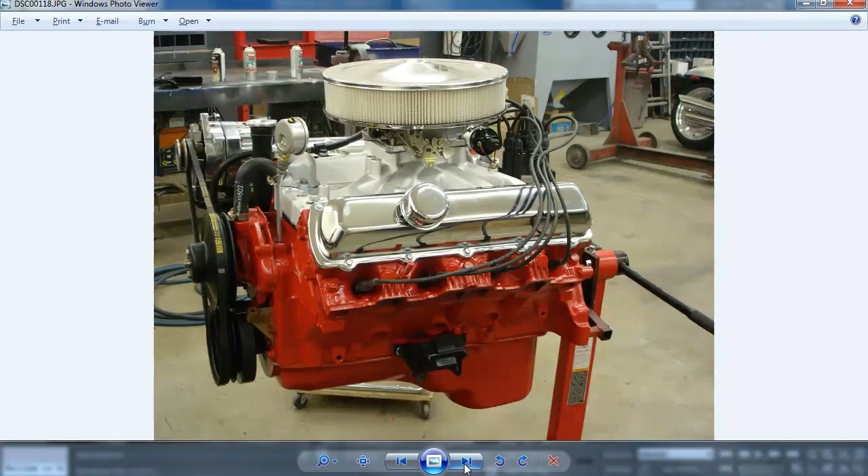Welcome to the second part of my hot rod tutorial where we will be continuing our highpoly engine. I talked about the other parts we're going to add detail to, and right now I'm just looking at my reference a bit more to see where I'm going to pick up where we left off last time.

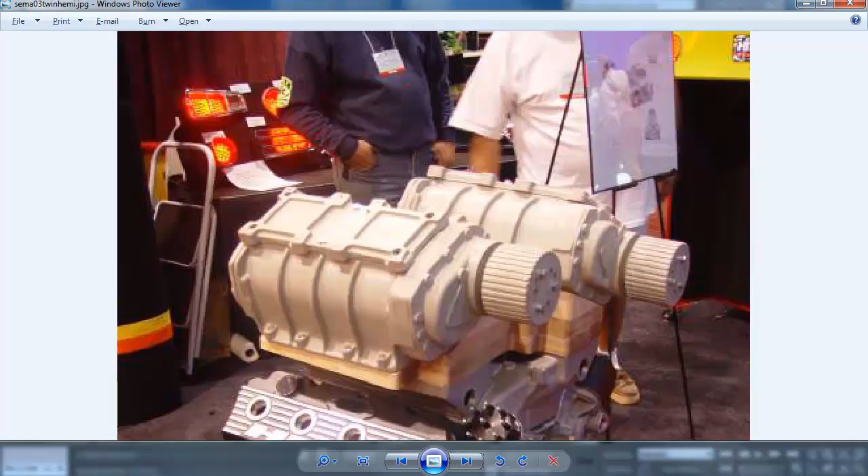At the top we still have to create the carburetors, which are the parts of the engine that mix fuel and air together before it gets transferred into the engine and ignited to power it. Those carburetors are on top because the mixture gets compressed by the supercharger beneath it - fuel is inserted into the carburetors, air goes through the big scoop at the top, and it comes out at the bottom as the compressed mixture that goes into the engine.

These carburetors are actually the most complex part on this engine model, which is why I'm not going to postpone it too long to start with it. If I have a really difficult part of a model that I'm not so sure how to do, where I can't really visualize it clearly, the best thing to do is get it done as quickly as possible. If you don't, it's just going to drag along - you keep postponing it, and in the end you might lose interest in the project and it might not get done.

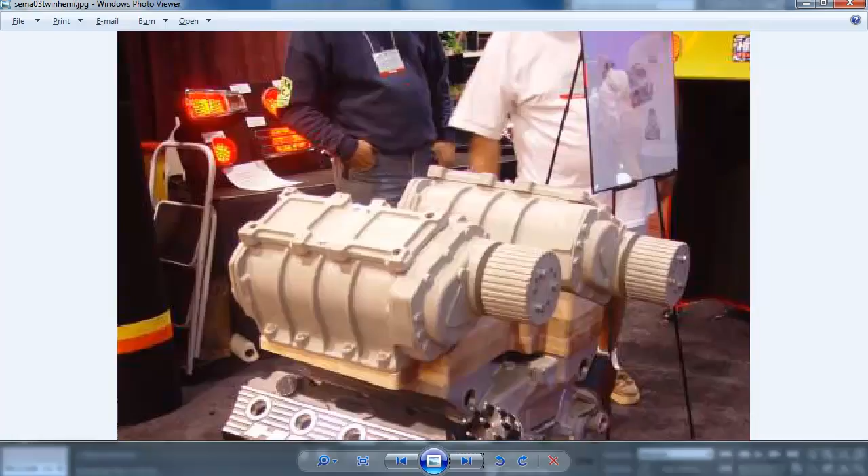So here I'm creating the structure - these little blocks that extrude from it, used to connect to the supercharger. I'm mostly going by that reference picture because it clearly shows what the connection part looks like. This part is technically still part of the supercharger, but it doesn't really matter since I'm creating it as a separate part - no way I'm going to model this in one connected piece.

There's no easy way of selecting all these parts - most of it you just have to click manually. It looks easy at 200% speed, but it's a bit tedious to select.

This is a rather complex block structure - we need to add some more edges in here to harden things up. It's easier if you do it by two. Since the distance between two edges, where I'm doing a connect between, varies all the time, I also need to vary my connect distance. If they're really close together, you need to lower the amount quite a lot.

Some parts I can't forget. At the top I forgot that I also need to harden that bit, so I need to add another one over there. Another part here - for such a structure, I really need to add a lot of them. It's not really hard, just can't forget to do them.

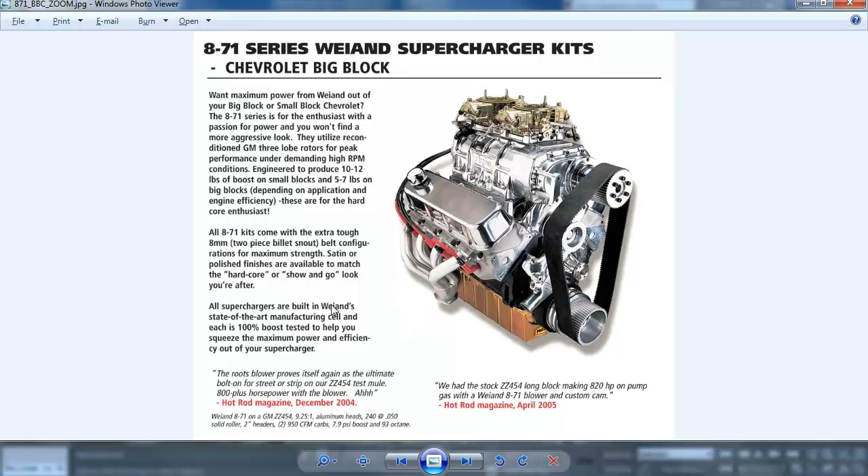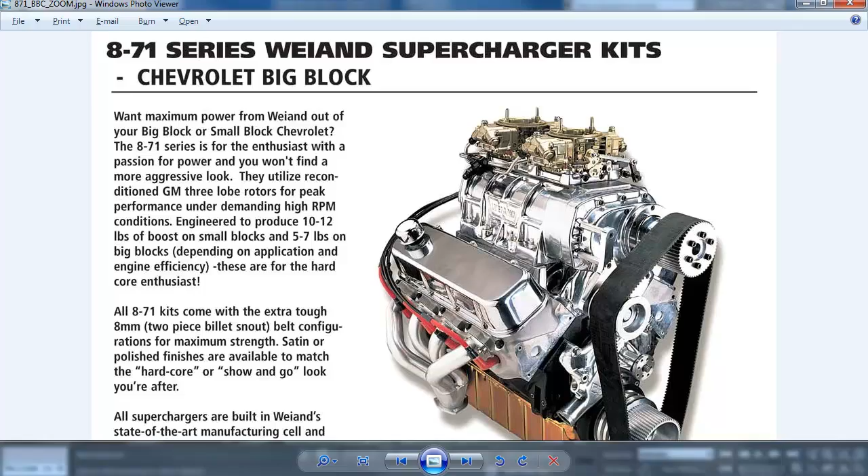The ones on the inside look a bit rounded too, but that's not so important because you probably won't see them so much. Mostly going by this reference also - this one looks quite interesting, I like the shape, the sort of V-shaped things at the side.

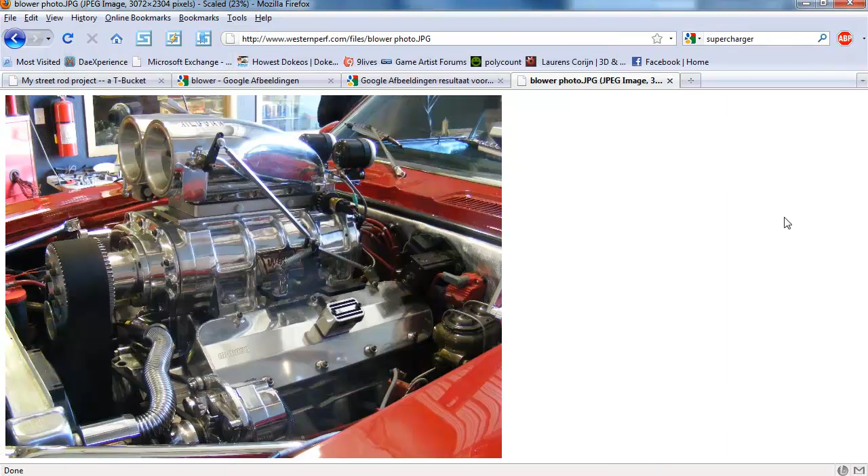Looking for some more reference because I think this is a tough part. It really helps to use different search terms in Google - it can make a difference. This one isn't so good. Yeah, this one's okay, but it looks really simple, so I don't think I'll use it. Still, it doesn't hurt to save it to my reference folder. Continue searching a bit more.

I'm just opening all these images in a new tab that I think are interesting. Adding '540' to it, since my engine's a 540, might help - just be a little bit creative with search terms. Yeah, this one looks okay too, but I think it's still a little bit too primitive in terms of shape and connection, so probably not going to use that either.

Blower engine - supercharger is another word for blower. You can see different stuff turns up all the time, so being creative with these search terms is quite important. That one looks good. Cragar blower - finding a lot of similar stuff now.

See what I dug up here. Wow, this one's interesting. It's a bit too square for my taste, but I'll save it anyway.

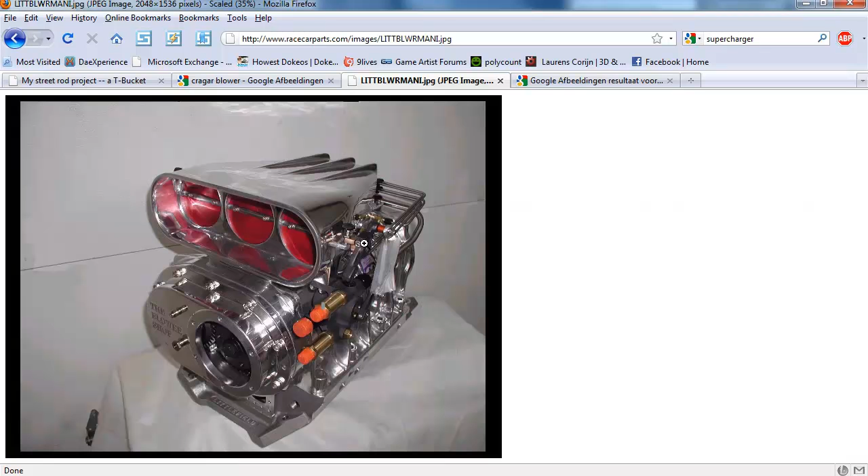This one's also the same square, simple layout. Yeah, this one's not bad either, but I like the fins on the back, though I don't think I'll add them. They're more 50s type than they are hot rod. This one's pretty good.

Let's see, yeah, these are some nice detail pictures. Too bad they're super low res. Can barely do anything with that.

So, Weiand seems to be another brand of blowers and superchargers. This one looks like an interesting picture. Yeah, this is definitely a keeper. That's the sort of stuff I was looking for.

So you see, when looking for reference, you might end up getting to know brands, words, terms that can help you in your search. See, this one's just perfect. This is exactly what I needed. Some nice, clear, high-res views from every side. And it's all because I got to know this Weiand blower supercharger brand. This is the sort of stuff I need to build these carburetors.

This one's a really nice picture too. You can see there's a lot of wires running around on that thing. I'm not going to make those because, well, first they're hell to make, and second they're just going to up the poly count way too much.

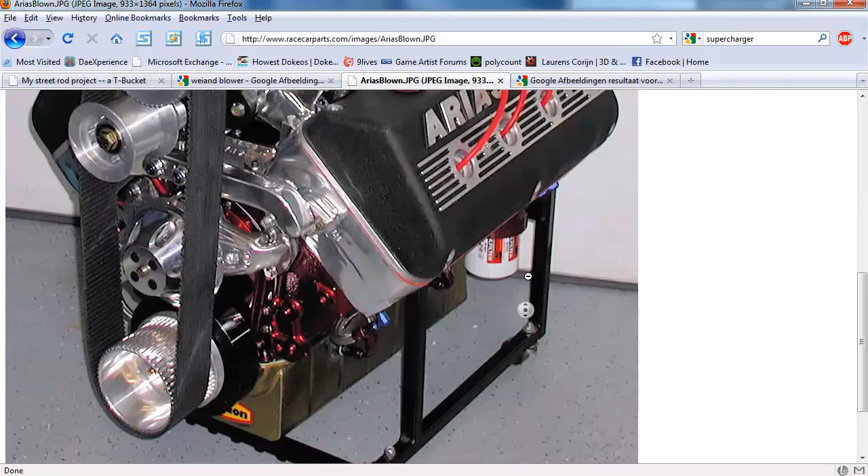And you probably didn't notice on the final result image that's been shown alongside the tutorial. This one isn't so cool. Looks more like the thing you'd put on a boat or a dragster, not really on a car. Well, I'll save it anyway. You never know, maybe even for a later project, it could come in handy to save any of these ref pics.

Because it's happened frequently that I remember when I started some project I needed reference, and I was sure I found this on Google searching for that term, but it turns out a year later it had disappeared and I couldn't find it again. Yeah, this one's great, really good.

So we have our base plate here, and create that part on top. So there's actually two separate carburetor units next to each other.

Takes care of better, more fuel that gets into the engine, since it's a really big engine, needs a lot of fuel. There we go, use bevel to create this shape.

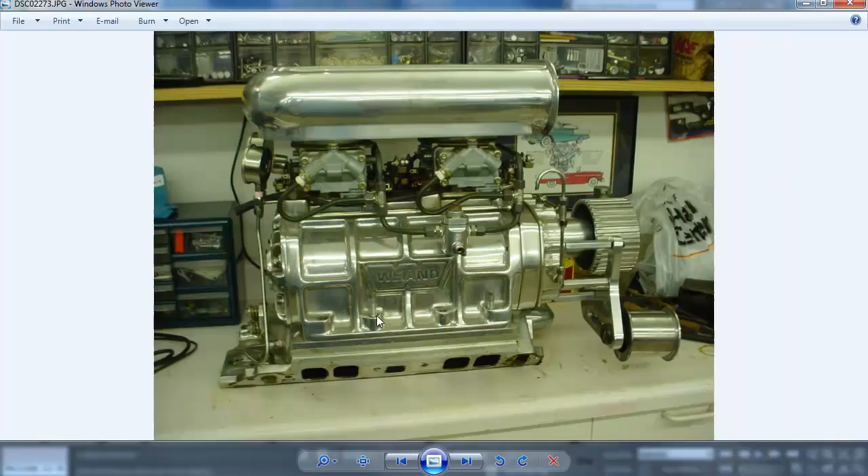Something like that. So you see, these are like, simply said, tunnels through which air goes, and fuel is mixed with it to create the exact fuel mixture of air and fuel. Because you know, a mixture can't explode if there isn't both air and fuel, an explosive component.

So yeah, let's see, I want to turn this into a round shape, so I need to do a little bit of tweaking. Select those parts, I need to space them apart so I can get that nice cylinder shape. Well, semi-cylinder shape.

I'm just doing it on site, just keep selecting and using scale. Why scale? Because it works in 2 directions. There we go, that's starting to look nice and round.

Harden things up a little bit, add those connects, then at the top...

You notice that I'm not really exactly following one of these reference things. For the general shape, which is quite hard to discern from the reference images, I'm just going along creating something I think would work and would seem viable.

You've seen this tunnel shape on the one I said looked more like a boat or a dragster engine, so I'm sort of mimicking that, making the top cylinder a bit fatter. Same old trick, reusing details.

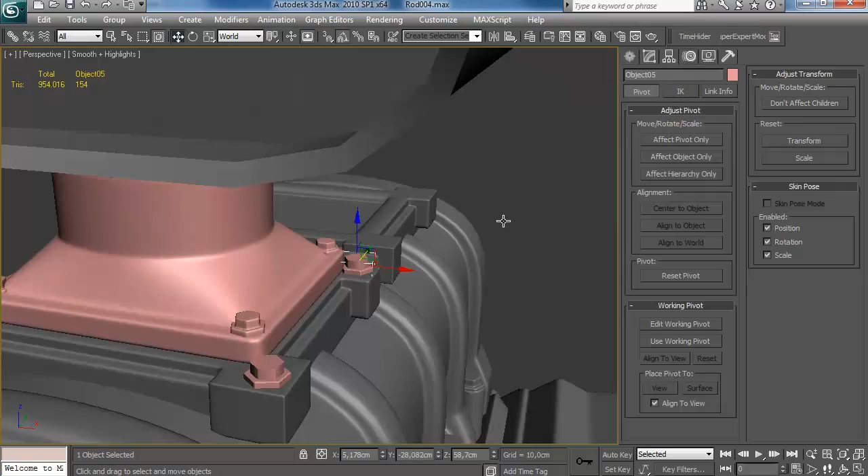Make those a little bit smaller. Move that about, just spacing these parts.

See, it's totally logical to add these bolts here because the carburetors and that carburetor base plate actually bolt onto the superchargers. So adding details like this is an easy way to get it to look more interesting.

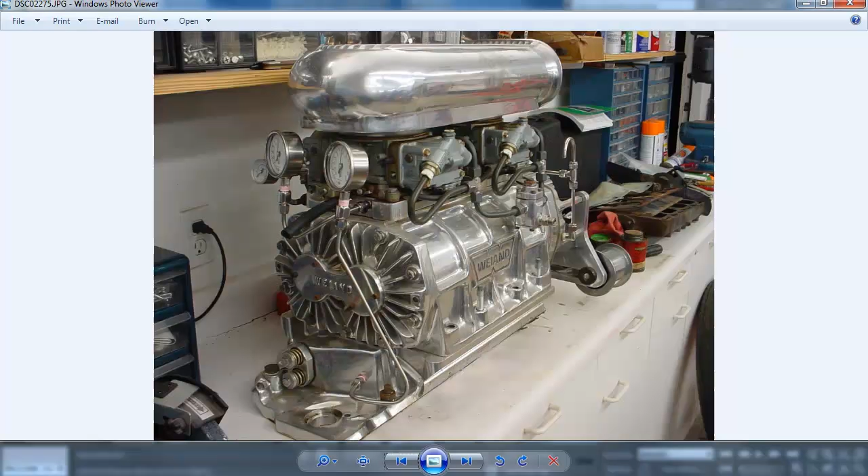You can see there's quite some bolts on these examples I have here. Also notice how the back from that one Weiand supercharger is really interesting. It has this fan radial shape of cooling fins. I'm going to add those for sure.

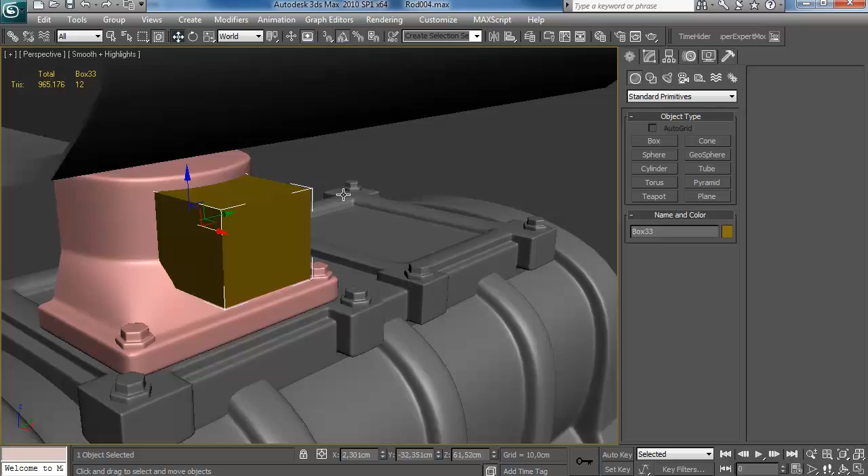Alright, so what I just did here, I deleted half. Why? Since I'm going to make these carburetors symmetrical. They're probably not symmetrical in real life, but I'm doing it anyway because nobody will notice, and it saves me a lot of time modeling, texturing and unwrapping, everything. So it's pretty much a no-brainer for me to do it like this.

It's definitely something to consider when you're creating real high quality art, especially in a company. You need to reuse and mirror parts and reuse texture space as much as possible, just to save time and work more efficiently. If you do everything unique, you're going to work on it way too long, use too much texture space, and creating your textures is just going to be too much work. So a big part of a high quality workflow is being efficient and doing things in a smart and thought-through way.

So it starts at the high poly, at the actual modeling. You need to think about the mirroring and reusing of parts. Sometimes if you do an extrude, parts intersect, so you need to fix that.

This shape is mostly going to make it look more interesting. I'm going to add those V-shaped parts on it as well. There we go, I got this little bolt part here. Rotate it, make it smaller. You see, I modeled this bolt once, and I just keep reusing it all the time.

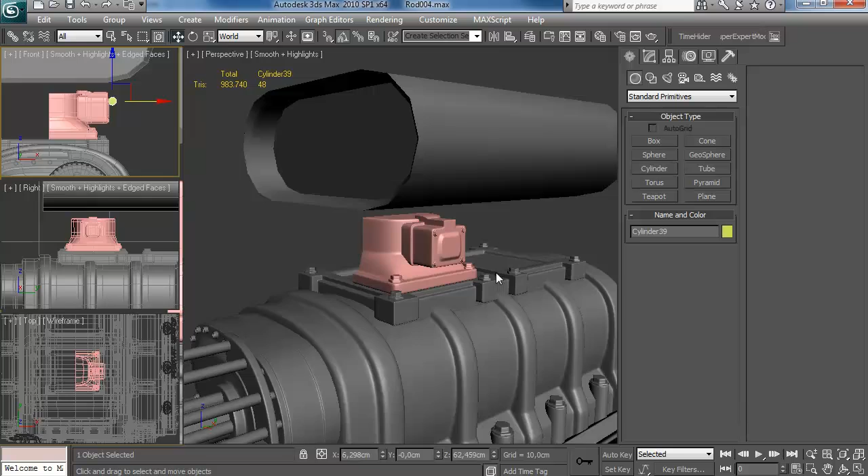Cylinder, I'm going to create that from the side here. This is going to be a little bit tricky to model, but it's nothing impossible. Some people who aren't really that proficient at modeling yet might be a little bit afraid of this kind of shape, how you would tackle two cylinders connecting at an angle. Well, it's nothing impossible, I'll show you. First of all, there's a little bit of a radius difference between them, like that.

Move these into correct position. Move that a little bit. The easiest way for this is I'm going to reset my X-form. And voila, use a symmetry to create the intersection for me. Then I just collapse the symmetry, do a little chamfer there, and there we go. I've created this perfect intersection.

Doesn't work all the time. Sometimes you have to manually align those things. I'd use a slice plane there, it's probably an easy way to get those things to intersect. Just adding some small parts to make things more interesting.

I deleted the backside, you don't notice that, but I do it most of the time. I almost never leave the backsides on parts that you won't be seeing.

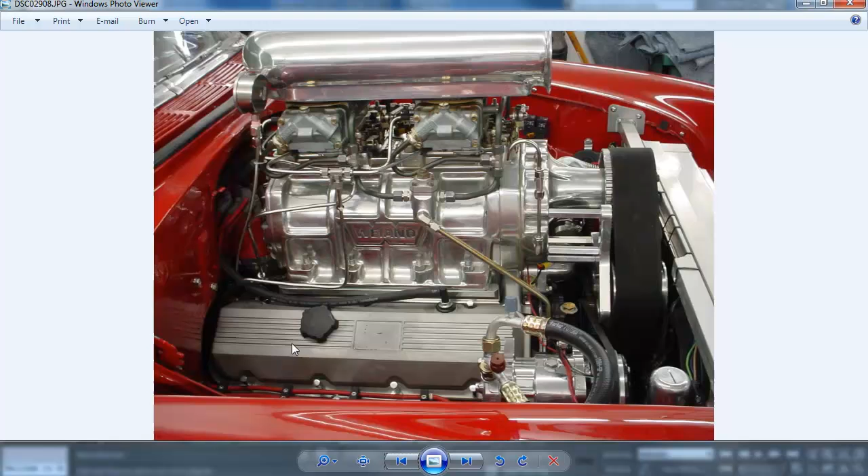Okay, so then we have our center part, copy that to the back side. The back and the front carburetor aren't the same, so we're just going to reuse the parts we created so far and then add some more to it.

Let's see here. Hide the supercharger. There's a cylinder on top with some insets and bevels. That is the actual connection to the blower on top.

First we need to delete half so we can use it for symmetry later. You can just use connect when you're doing that on a cylinder. First I do this inset. Why did I decide to do it the other way around? If you do insets, extrudes, whatever, on half of a cylinder, you'll have the center of your extrudes and insets on the wrong position, the wrong pivot point. So it's best to do that first and then delete half.

So there we go. Just have this simple shape here. Move it to the middle, attach, and also copy that to the other side. Try and align it nicely to the center. You see, those bottom parts of the carburetors aren't perfectly round, but who cares? You'll never notice.

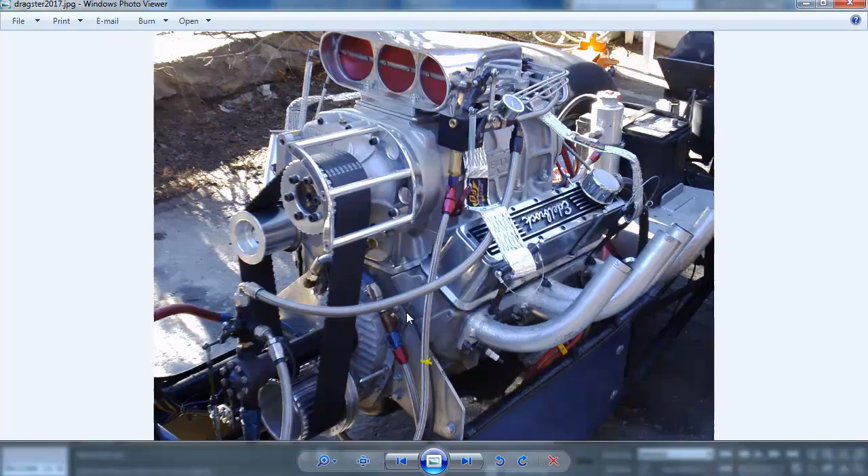Looking if I can fill this middle part up a little bit more. Add some more lines to make things more interesting.

You can probably tell that this is, since it's a more unreferenced part, not really the strongest part of the engine. But in the real carburetors, it's filled up with a lot of hoses and wires, and I could do that, but it might get a little bit too tedious. And then again, on most views, this part is probably going to be like, what, 10 pixels or something, so it's really not worth it to put that much effort into it, I think.

Duplicate that part. Oh, there we go. And I'm adding some cylindrical details here. Just doing some detailing on the cylinder, so it's not just a cylinder.

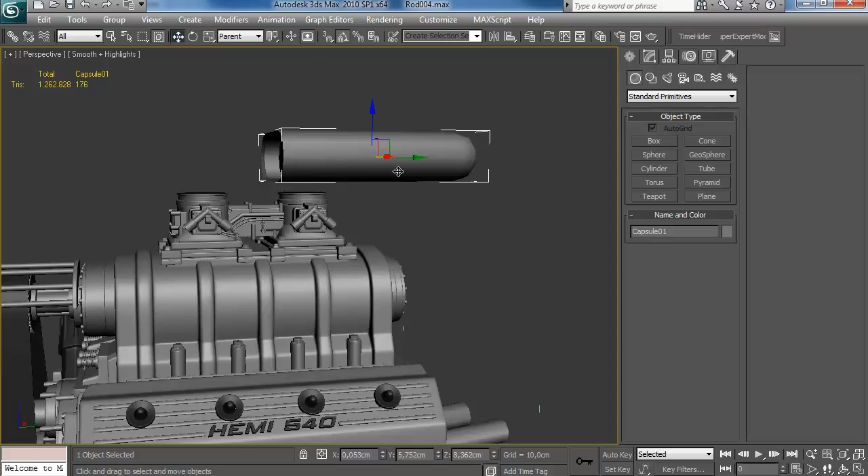And something went wrong here. This one, since it was attached to the carburetors and I reset the XForm, it got screwed up a little. The scaling changed, so I'm just going to try and fix that a bit.

Let's see. I'll just model a little bit extra on this and look at the scaling later. I think it's not perfect yet, but I'll just model a bit first. Need to harden things up so I can add a TurboSmooth there. This one really isn't a complex thing.

You see me adding edges here that don't seem to contribute to the silhouette. Why am I adding them? They do contribute to the silhouette when you smooth it—it might get contracted or slope a little too much if I don't add these buffer edges around there. So this is an interesting picture to go by.

The blower valves, the holes in the front, I'll add those later—not for now. Okay, so the carburetors are looking okay. I probably won't add too much to them anymore. I think they look fine.

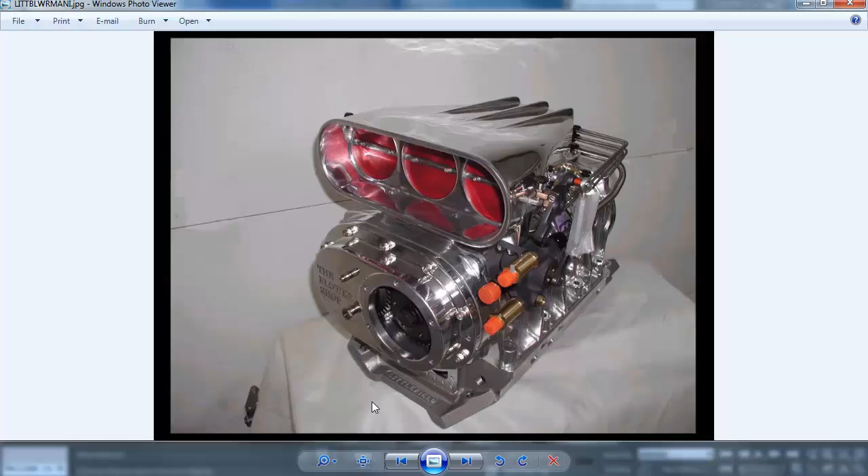You see I'm going away, deviating from that high-res reference I'm using for the main engine block. I want my blower to be different. Don't be afraid to combine reference—if you like one part from this picture and another part from that picture, just do it.

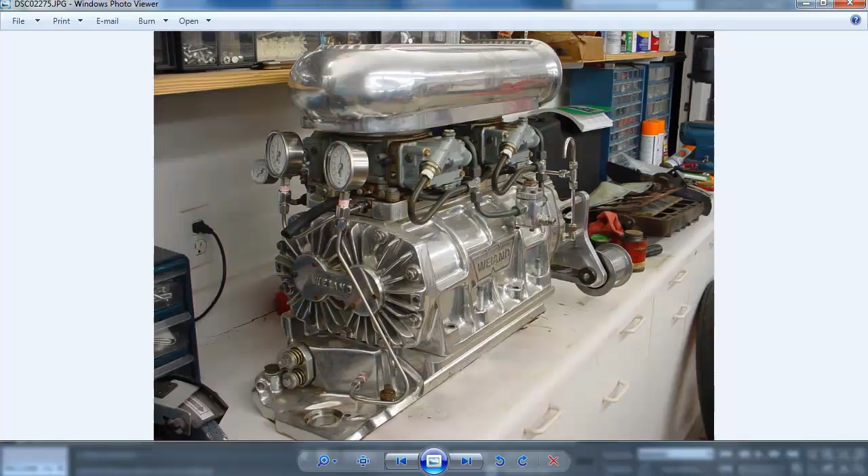Now here what I'm trying to do is on the back side of the blower—you can see there was this, how would I call it, fan type of shape which I really like. I want that on my blower as well, because if you look from behind or from in the cockpit, you have some interesting shapes to look at.

There are actually two cylinders, two circles next to each other, which have these fins running outward radially from their center, and they're connected in the middle—so you have this, how do you call it, dog bone type of shape in the center. The Weiand name is on there in the front, at the back, but I'm not going to create that.

And here I'm making the shape a little bit more interesting. I'm just going to use symmetry on that so I don't have to model any parts twice—flip it if it's going the wrong way. There you go, that's starting to look good.

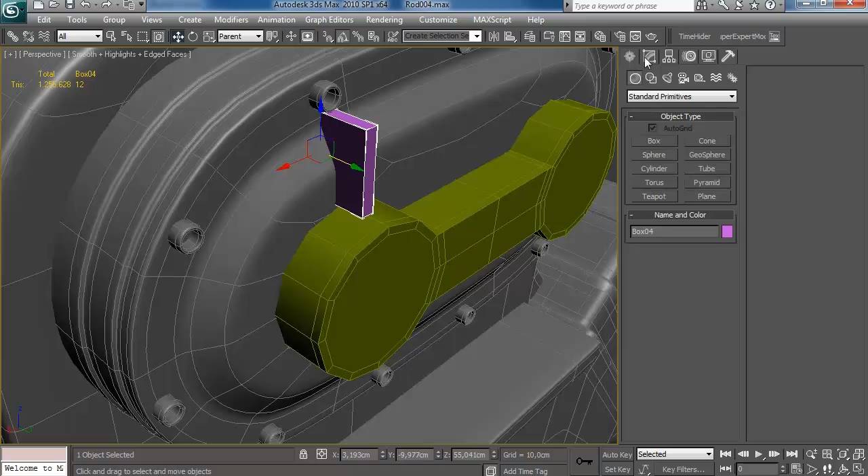And now I'm just going to start creating those fins. This isn't hard, but there's some interesting workflow tips in here.

The fins start off straight, but they round down at the end. The proportions of the back of my supercharger are a bit different than on the reference picture, but that doesn't matter. Those proportions aren't so important. As long as it looks and feels right with the rest of the engine, then it's going to be okay.

So there we go. I've aligned the pivot to the center of the circle so I can create an array, and I'm just looking for the correct number to get these parts to rotate around. It's not 180. 210 seems about right. There we go. Need to up the count a little bit.

It's a little bit annoying that if I type in a different value in count, the number differs too much. I'm just going to use 360 because it doesn't give me any headaches. There we go, this looks good. That one at the center needs to go too.

And now I can just attach all these separate parts, and my symmetry will copy them to the other side just fine. Look at that. That's pretty cool to look at, right?

I still think it's protruding a little bit too much from the back. I probably need to move them in quite a bit. You can tell because there's so much dark shade on the sides. I need to move them a little bit like that. Yeah, like so, that looks good.

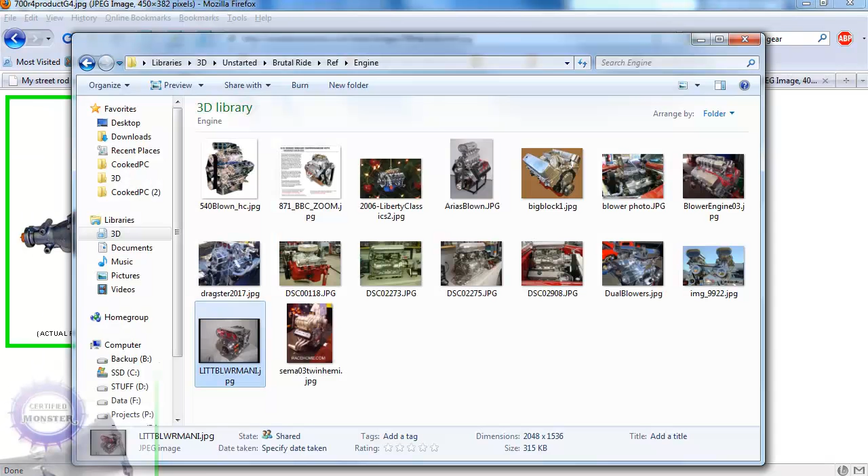They have a few here. I'm just looking, most of the time they use the same pictures, so I'm just going to go with that. Some of these you can tell are a bit more modern. If they're more square with more detail, then they're probably for more modern cars. But whatever, any reference helps. Just save these.

I'm looking for this reference because I don't feel confident enough to start this transmission from scratch without looking at reference. So to fix that problem, some googling. Muscle transmission, anything that could turn up with good results. Oh, that one looks okay too. See, it's a big generic shape, sort of a cone shape, and then there's some smaller detail running along it.

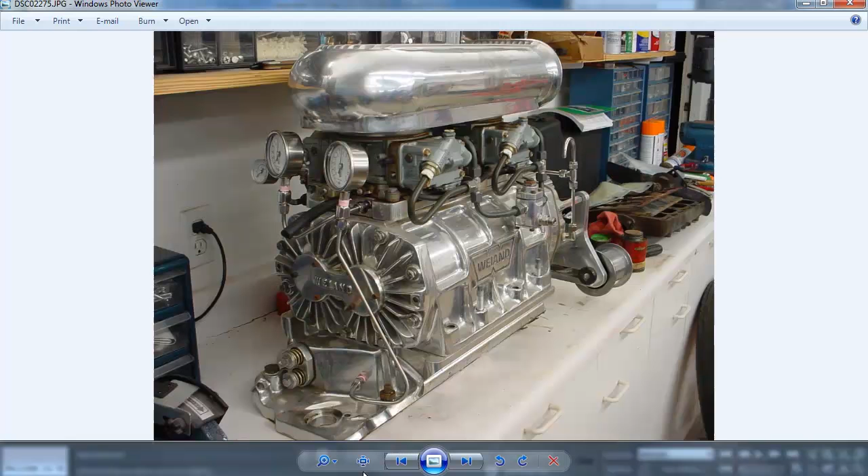So I'm just looking at my engine, thinking what will work best. Oh yeah, and a note: if you're using Windows Vista or any Windows, and you're using the image viewer, and you've got a directory open, you add new images to it, you have to close the image viewer and open it again to see the new images. So that's why I'm doing that.

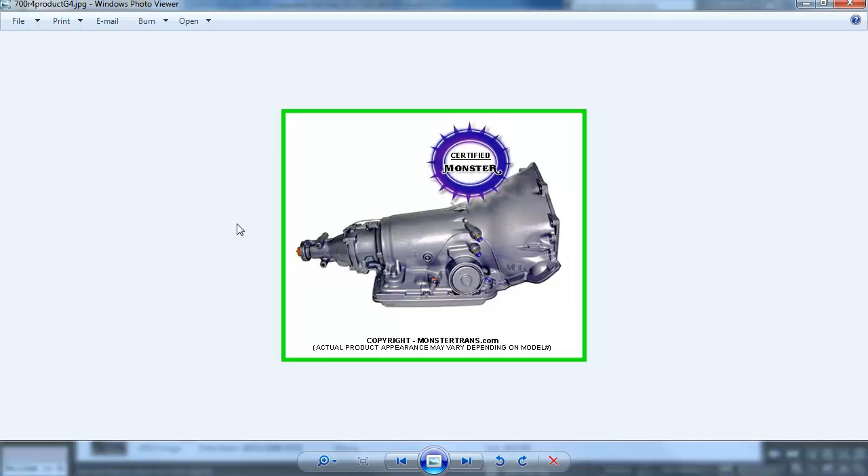Here, this one's really interesting, I'm probably going to stick with that one a lot. This one not so, I think it would break a little bit with what I have as a shape in my engine. My engine is also an older type, and I don't want to add a newer type transmission to that.

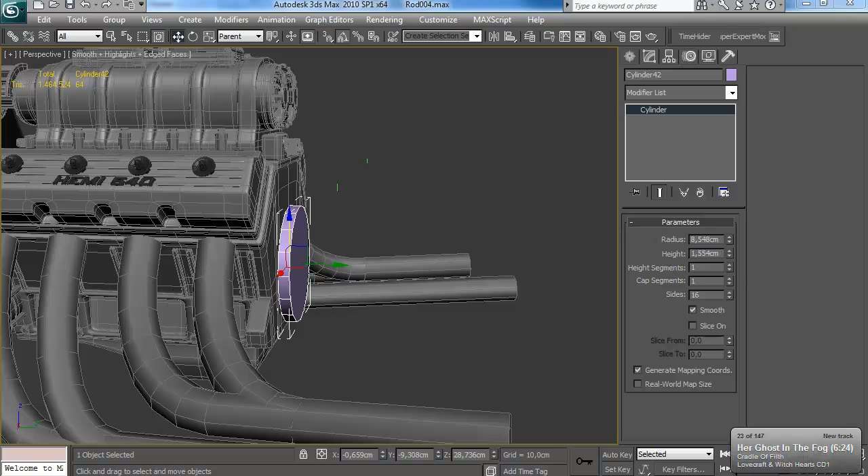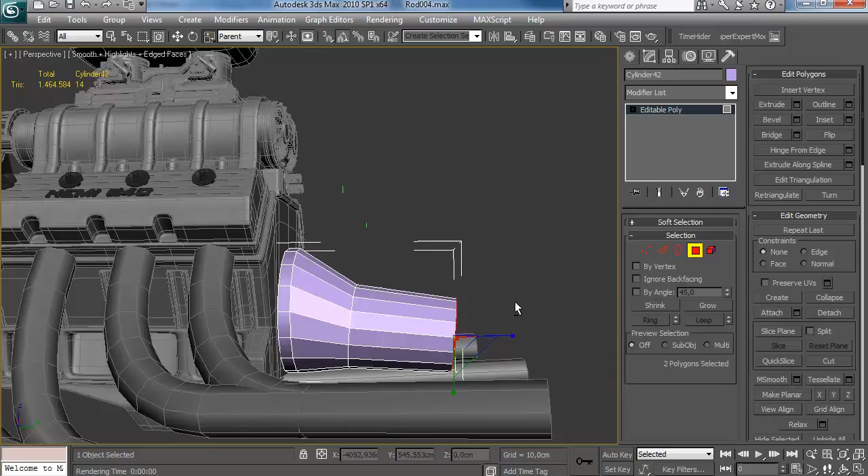So that's the foundation for my transmission, a round shape, and converting it to an editable poly, doing a connect in the center. First I'm going to do the operations that require my pivot to be in the center, and after that I'll delete half and continue with that. Like so. Alright.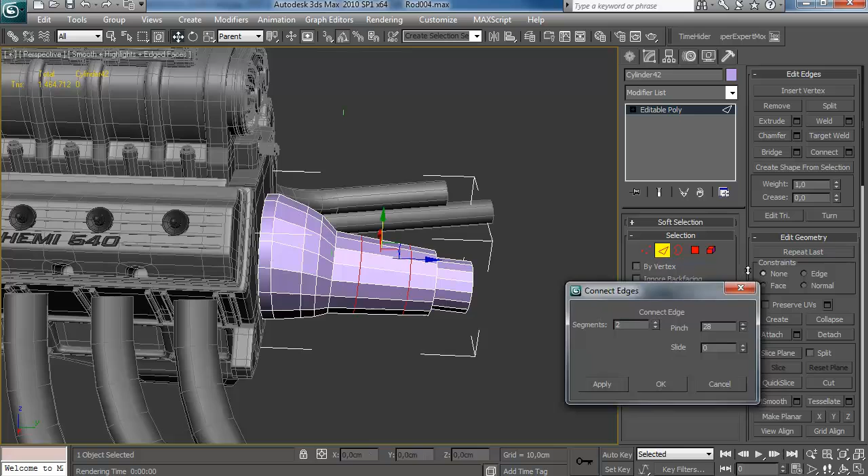First I'm creating the big general shape of the transmission, and then I'll just continue to add more detail to it. I want to get the proportions right on that. You have to note that this part probably won't be so visible since it's going to sit behind the engine, at the bottom of the car. It's partly hidden under the body, so I don't have to go too wild with details, especially on the top at the back, because that's just going to be invisible. It's going to be completely covered by the car.

But I also want this engine to be something that can stand by itself. So if I make a render of just the engine, it looks interesting. You'll see more on that in a later part. So that's why I might add some more detail here than is actually needed. There's these interesting shapes on there.

You'll notice I have tris here now. Yes, tris in my highpoly mesh. That's not a problem if I know what I'm doing. I want the specific shape here, so I'm just going to stick to that. Yep, there we go. See, there's a little bit of pinching there, but I'm not going to worry too much about that because you probably won't see that too much. Sometimes you have to think, is it going to be worth it to fix these errors, or should I just leave them and people will barely notice them?

Yeah, I'm changing this shape a bit on this transmission. Also, I should explain to you why this transmission has this specific shape. You have this big part at one end, and then there's a smaller part behind it. The big part that connects to the engine, that is where the clutch of the car is located.

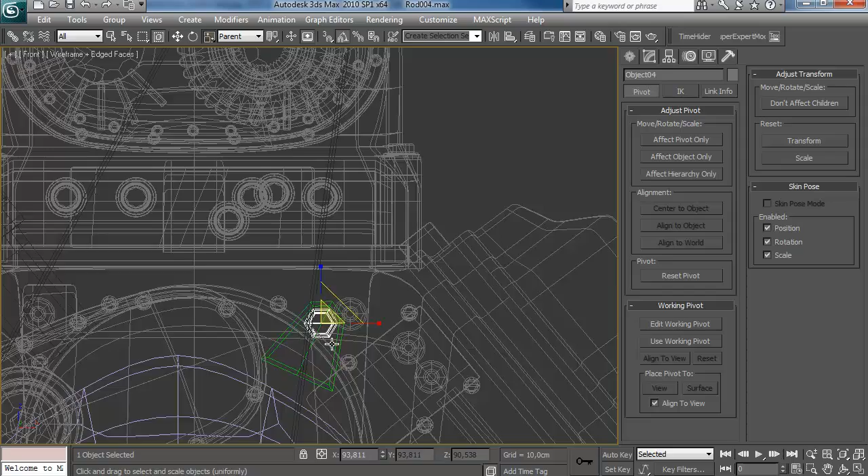Because a car engine works like this: if you would apply the torque from the car right away to the rear wheels, immediately, then the engine would stall and stop. You've probably, if you've driven a car before and you just release the clutch at once, your car stalls and the engine will just die. So the clutch is actually a torque conversion component that makes sure the applying of torque shifts smoothly onto the back wheels by gradually increasing the amount of torque that is transferred to the rear wheels.

So the clutch works with two or more, well, it's probably more than two plates that move along each other. Most of the time these clutch plates will be inside oil, so that they move over each other, and the more you release the clutch, the more they will be pressed together until they completely grip into each other. So the clutch is a part that can slide or grip into each other depending on how much force you apply to it.

And then behind the clutch, when the torque is transferred to the rear wheels, there's the gearbox, because if a car would only have one gear, it wouldn't be that easy to drive. So the gearbox actually converts the torque by a ratio. But it's actually the rotation speed that it converts. So the gears are in the smaller center part of the transmission, and then at the back they'll just be a connection part for the rear axle, which will go to the rear wheels.

So you see, I'm creating these attachment parts with bolts at the back. And why am I creating these? Well, because the transmission and an engine are actually two separate components.

If you paid attention, in the website I'm following, the guy is using the transmission from a Camaro but some other engine—I think it came from a Pontiac or something. So you can actually combine transmissions and engines because they're separate parts; they bolt onto each other. Not all engines and gearboxes will fit probably, but a lot of them will.

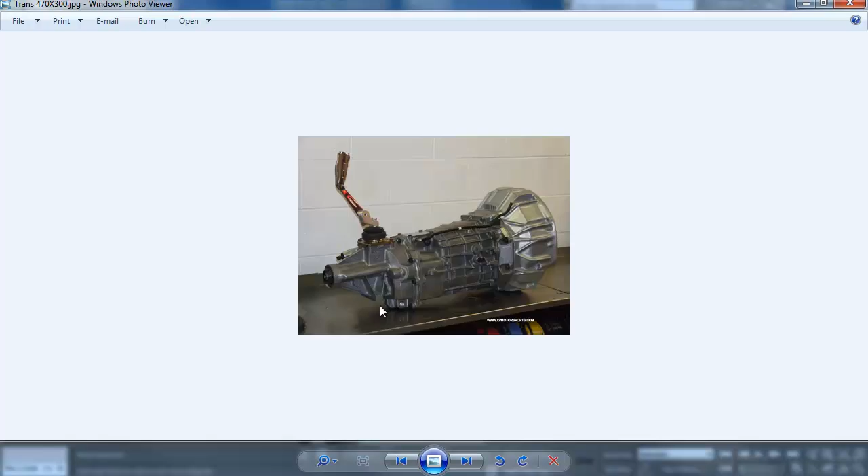I just attached those two parts together, so I have one less symmetry to worry about. So this transmission isn't done yet—there's quite a lot of detail we have to add, but I think the big general shapes of my engine are here. I see lots of stuff attached to it that I need to model. You'll notice my transmission is simpler in shape than what you see in the picture, but no one will notice.

And then there's this box type of shape that sits at the end of the transmission, and at that part it connects to the drive axle. Something like that. That looks about right.

We're going to attach that part and duplicate it so it looks like two of them bolted together. One problem I have here is that my pivot isn't aligned with the orientation of these parts. Not much I can do about that other than manually compensate for it. As I said, it's a part you probably won't see too much, so I'm not going to worry too much about that.

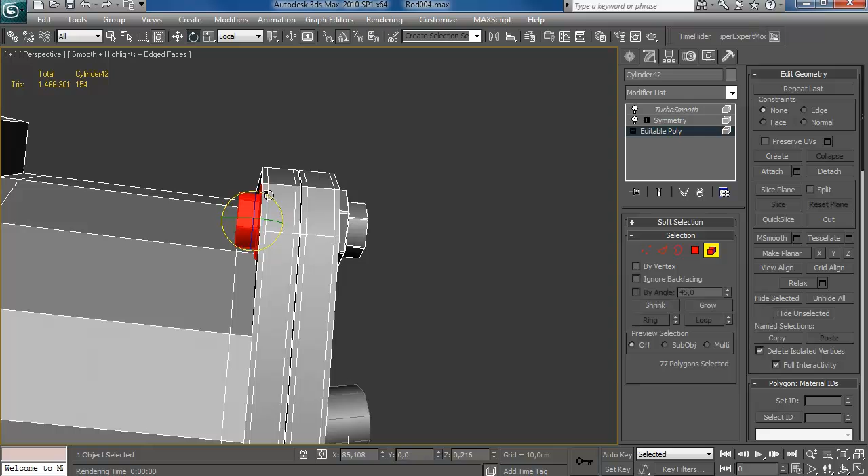Add these bolts to it. You can see the local axis is aligned correctly with it as well. That's starting to look okay—still, the center needs a lot of detail. Looking at those other reference pics, I really don't see a lot of parts I can relate with that I think I could use in my gearbox easily, integrate them, make it work with my shape.

So I'm just gonna stick with that one concept more. At the center, there's this box type of shape that follows the clutch housing—I'm going to create the same type of thing. In the real one this would probably be connected, but I'm not going to bother with that, just model them separately.

There we go. Change the music a little bit and continue modeling. Adding some connects to that shape, and as always we're just going to attach it once we're done with it. It's starting to look better. We need to add a lot of these—we're absolutely not done with it yet.

Another box shape. This one's going to be a little bit tricky to create. It's the same type of thing as I made on top, just thinner and on the sides, so I need to model it again. Also, because the shape of the clutch housing isn't perfectly round, it's going to have to be tweaked at every place I add it.

Delete the back side since you won't see those. I want a little bit of a hard shape there. And of course I want to move it into the center of this attaching part, tweak it a little bit so it fits. Align the pivot to the center of the gearbox, and you see now I created this one, it doesn't fit nicely. I need to tweak every part separately, which is a little bit annoying, but it has to happen.

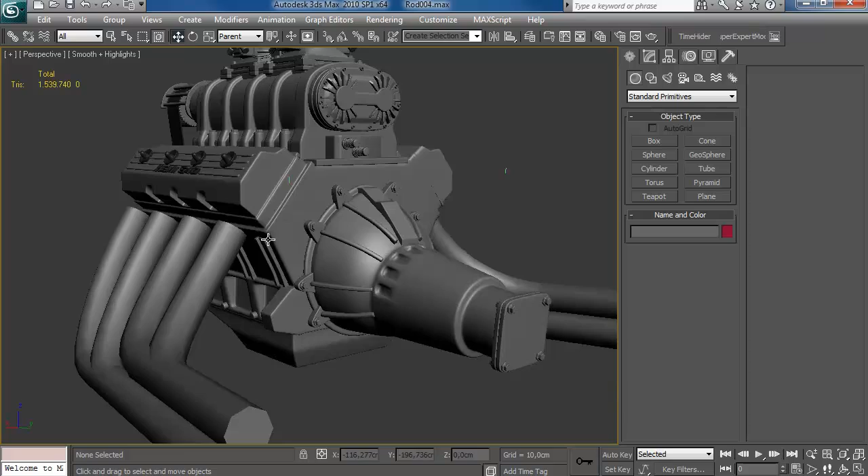Attach these parts, have a look at them. That's starting to look more interesting—really getting this transmission feel from those parts. And those ridges they add on there are probably just for reinforcement, or they might be oil canals. Not sure.

Alright, so what's the next thing we can add to this? I'm gonna add some sort of shape at the end of those parts, just so they don't seem to end in nowhere. Delete the insides, like always. Add those connects, and just duplicate this part. You see, it's a really simple box with some connects for the highpoly, but it'll do its job fine for this purpose.

And I'm going to duplicate those bolts, just to make them look more interesting. This isn't so technically viable that there are bolts on that end, but who cares—from this distance it looks acceptable.

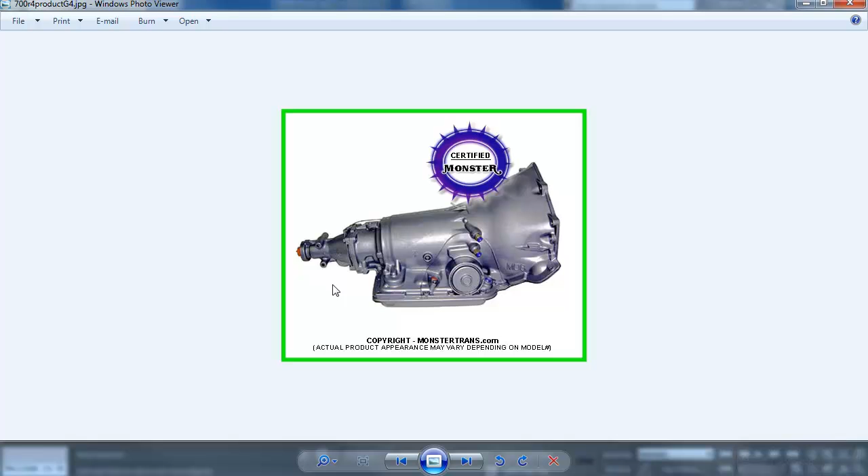Okay, so how do we continue here now? There's this round shape at the side and quite a few smaller details that look a bit harder to visualize, so I'll just start with that big round shape.

Delete the inside and try and replicate what we see on that picture. It's got a few interesting shapes that aren't that hard to create. Some insets, some extrudes - just alternate a lot between them.

To the center. There.

So you see me switch a lot between inset and extrude. You can do everything with bevel too, but then sometimes you lose the settings if you reset them. There we go. I forgot one connect here, so I'm going to need to add that. There we are.

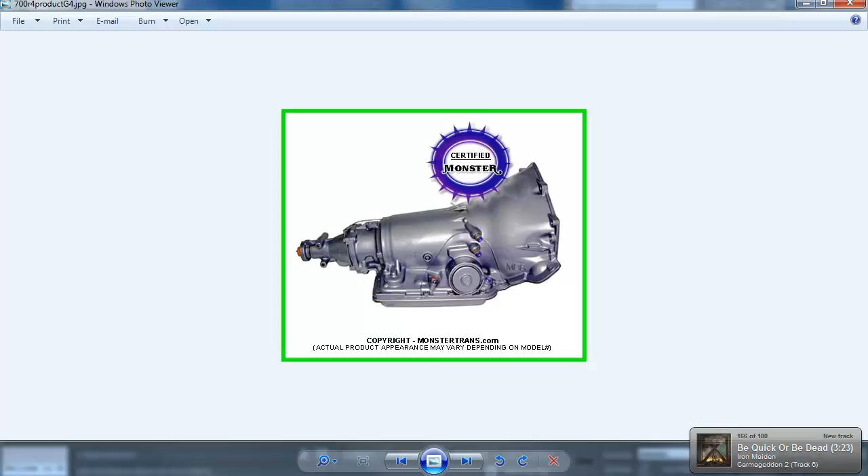I'm adding a box there, because as you can see there's a little box shape on the top, so I want to replicate that. Delete the inside. That should look about right.

I'm going to create more than a simple box shape there. Add my connects, move the parts inside a little bit, and now attach these all together so I can see the result with a turbo smooth. There, that looks better too.

And there's some more detail connected to it - some bolts, some round parts. Reduce the number of sides. Even if you're working high poly, it's best not to increase the number of sides too much for small parts, because you'll barely notice that.

And it could increase the poly count a lot if you're going to do like me with this part, duplicate it all over the place.

Same type of shape. I could have reused it from somewhere else, but just to add some variation, I'm taking the 1 or 2 minutes to create another one. Like I said, I'm adding these on places where parts intersect, on corners, so you can't tell that much that they're intersecting.

It looks viable, and it fills up these places nicely.

I have no clue why, but some of these parts are at really strange slant angles, so I'm just doing the same thing and adding those as well. It's probably because of how the gears are inside there, or I don't know.

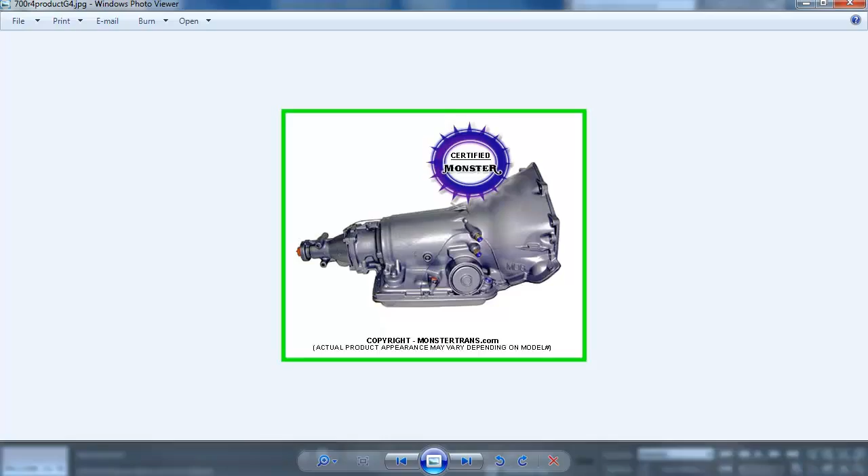That's looking better too. And there's this interesting looking ridge at the end of the gearbox. I'm just going to create that too.

Yeah, I need to delete those parts since, like I said, we're working with a symmetrical shape. And add the connects there.

If you've never worked with high poly, you'll probably notice that this is what you're doing most of all, adding those connects to harden shapes up - well, especially with the mechanical high poly. There, makes the shape more interesting.

Alright, so this video is quite long, so I'm gonna cut it short pretty soon, and we'll just continue from what we're doing here in the second part. We still have quite some stuff to add, so just adding these final bolts here, and I guess I'll see you in the next part.